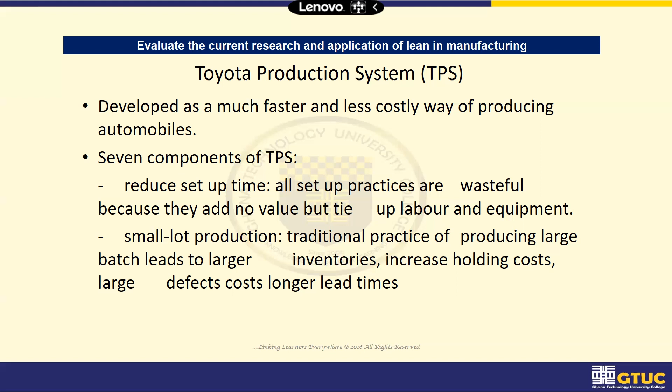And then we have the Ford production system, which is quite different from the Toyota production system, that one had certain core concepts or core principles that guide it. We are saying that it is a lean, flexible, disciplined production system that empowered people to produce and deliver products that consistently exceed customers' expectation in quality, cost, and time.

Let me also rehash this point that lean does not lead to exceeding customer expectation. Lean believes that if you exceed customer expectation, you produce what the customer has not requested, you just want to excite the customer. What you are doing is producing waste because it's not going to add any value and the customer is not paying for it. So with Lean, we rather meet customer expectation.

But what we earlier discussed, the Toyota production system, was rather practicing that part of Lean that is more stringent. But the Ford production system says that it is Lean flexible. Now you see that we are being flexible with the principle of Lean, and instead of meeting customer expectation, we're exceeding.

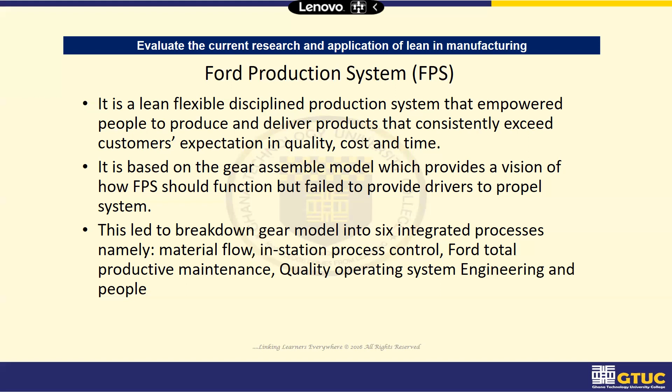And this led to the breakdown of the gear model into 6 integrated processes, namely material flow, in-station process control, total productive maintenance, quality operating system, engineering, and people. So the gear model was segregated into 6 processes, which is what I have just mentioned: material flow, in-station process control, total productive maintenance, quality operating system, engineering, and then people.

So these are the explanations for the 6 integrated processes, where you have the material flow, how manufacturing material flows, and we have the in-station process, where the issue of jidoka comes in, where workers are empowered to detect and eliminate defects based on tools like stop lines and Andon boards. We'll talk about jidoka, what it means, and we'll explain that further.

We have the 3rd, total productive maintenance, which is a preventive maintenance system. We predict the reliability of machines with time, the number of hours after which we have to intervene, and then ensure that machines do not break down.

So if you are minded, you realize, those of you who are in the automobile industry, my good friend who works with Japan Motors, now parts have a number of hours that they have to do. It's not like those times where they could use the part forever and even go and modify it and all that. There are certain parts, even plugs, that have a lifetime. After the number of hours that it needs to do elapses, you will have to replace them with new parts. And that has been the norm.

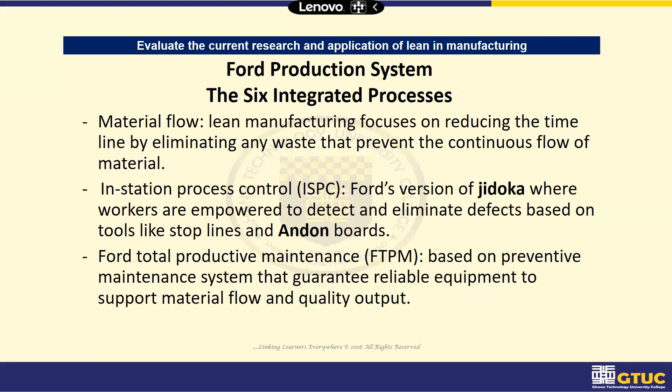And there is also the fact that intermittently, these things can break down, due to no fault of anything. It might be an unexpected mishap that probably happened during production. So you see the number of times these things have happened, and you can leverage on it and develop a preventive system where at any point in time when the thing breaks down, you have the part to replace in order not to stampede production. So total productive maintenance is also part of the Ford system.

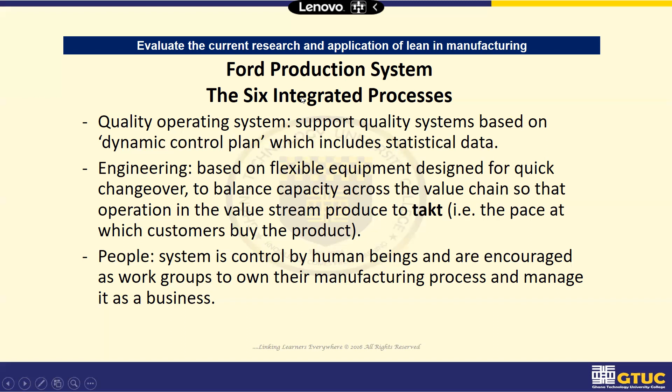We talked about quality operating system, engineering, and people. People here: we said the system is controlled by human beings who are encouraged as work groups to own their manufacturing process and manage it as a business. So with this one, the Ford production system tries to integrate people into the system. And the fact that they have to own the process literally means that people are delegated with power to be able to work and be responsible for their actions or inactions. So that's just about the Ford production system.

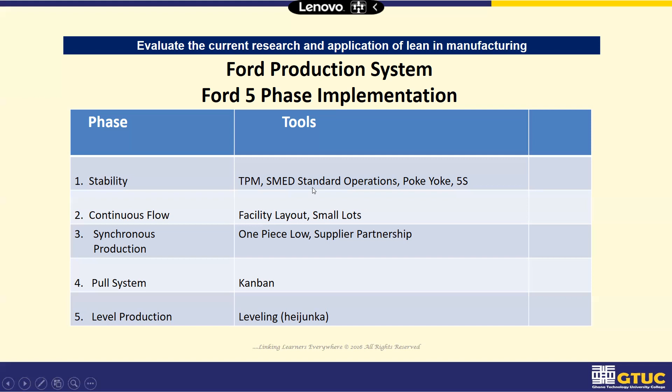Then you have the 5S's. So when you are doing stability, these are the tools that you need to use. And then you can also do continuous flow, where you have facility layout and small lot, as tools. For synchronous production, use one-piece flow and also supplier partnership. And the pull system uses Kanban. Kanban talks about the pull system. And then level production, where we are using leveling, that is Heijunka. So that's what the Ford production system is telling us. So these are the 5 phases.

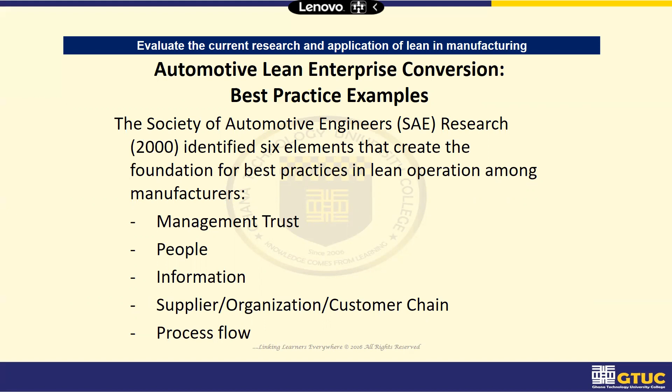Then we have something we call automotive lean enterprise conversion best practices. I'll leave that to you. The Society of Automotive Engineers research identifies 6 elements that create a foundation for best practices in lean operation among manufacturers. These are management trust, people, information, supplier, organization, customer chain, and process flow. This is what SAE proposed as best practice in lean operation amongst manufacturers. So they need to take these things as principles or best practices to follow. That's what they prescribe.

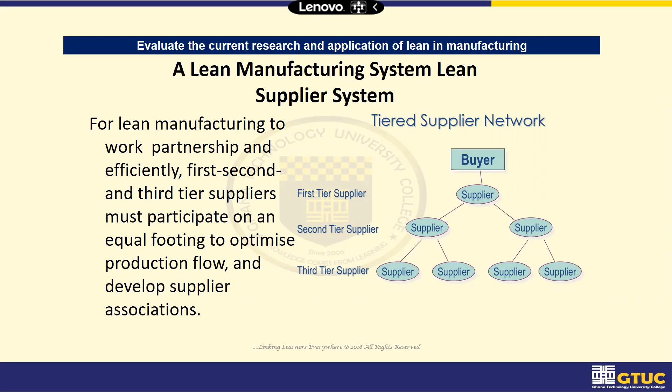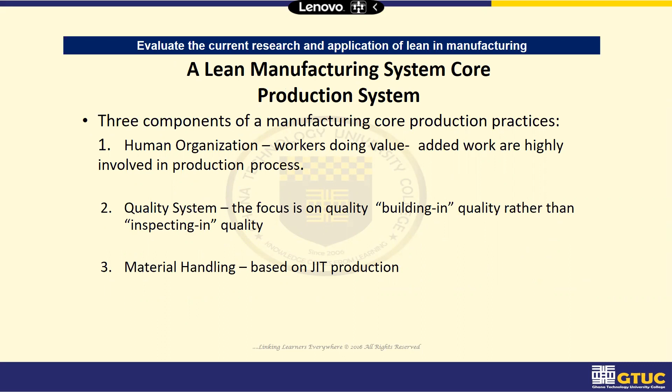So this is how the suppliers are segregated, and we make sure that they all practice this lean system. Okay, so these are other things that we can look at. You can read about a lean manufacturing system, core production system, and elements of lean production by Nicholas, 1998, small lot production. These things, you see some of them repeating, and the setup times, which we've talked about.

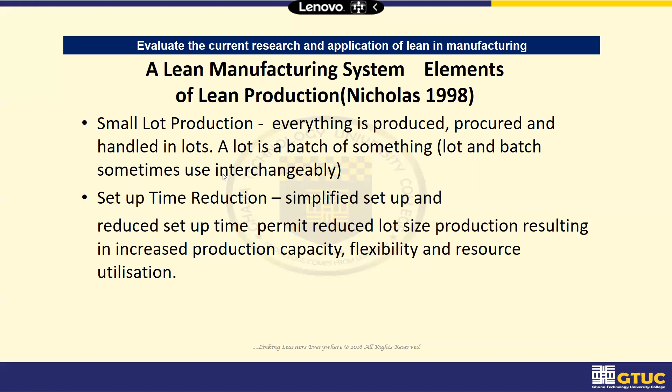But one thing you should know: even if you look at the lean Toyota production system and then the Ford production system, you realize that most of the things are concepts that have just been altered. Okay, so they look the same. One says that it's being stringent with lean, that is the Toyota production system, and the Ford production system says that it's being flexible. And these are just semantics, in my opinion, as they use some of these concepts. Okay, so that is just about it.

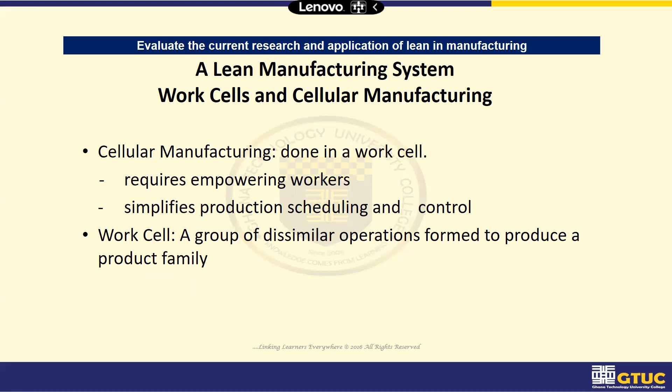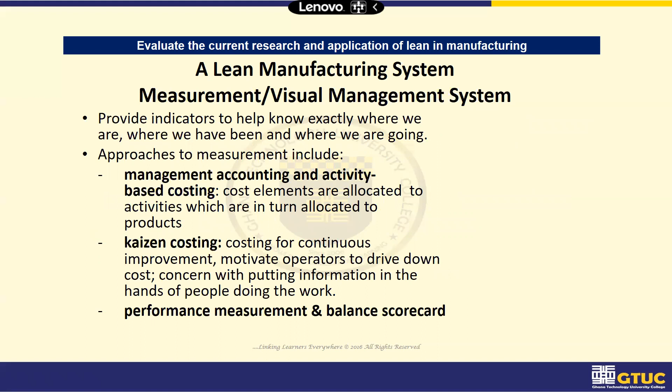And then we talked about the work cells and cellular manufacturing. The single piece flow cell is based on cellular manufacturing. We are going to deal with it as a separate topic and discuss it in detail. So that is just about it. These are all snapshots. Visual management system is also one of the learning outcomes, which we are going to talk about. And then we said that the foundation model of lean focuses on two main things: value added focus and sources of waste. These are the main foundation of lean.

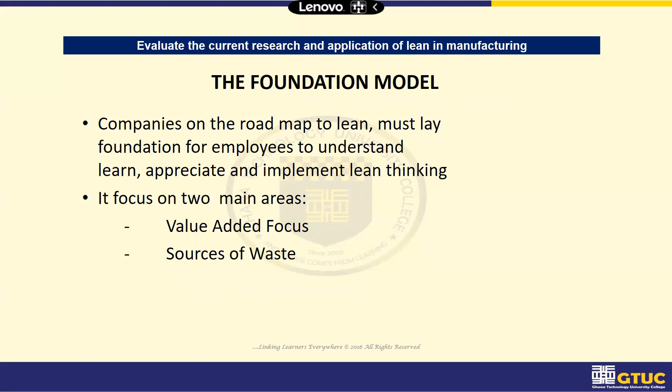So if you look at the lean house, you realize that what they are talking about is more prevalent in there. So you see the value added focus, and then identify the value stream. So this model helps you if you want to implement lean to go this way. Okay. We are saying that the value added focus is a concept that every activity and element of the system, material, human, should add value. If it doesn't add value, eliminate it.

Okay, according to Womack and Jones 1996, value can be defined by the ultimate customer, and it's only meaningful when expressed in terms of a specific product. So it's only the customer that can tell you what value is, because he or she is the one investing into the business, and they can tell you whether they are getting value for money or not. Value is created by the producer from the customer's viewpoint. So you don't determine value, it's the customer.

And then we are saying identify the value stream. Value stream is a set of all the specific actions required to bring the product through the three critical management tasks of any business, namely the problem-solving task, information management task, and the physical transformation task. So to create value, you need to look at the stream of the value, and these are the three main streams that help you to achieve that.

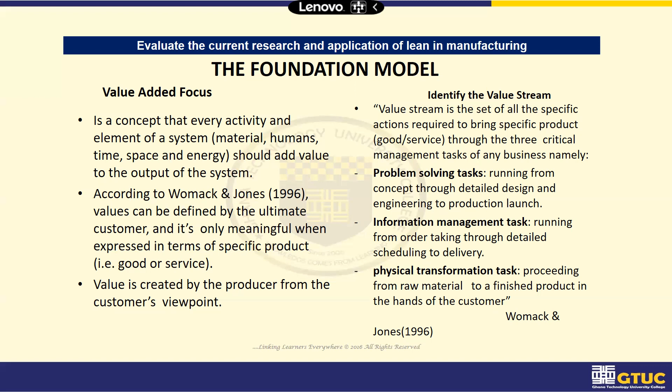In problem-solving tasks, you are running from concept through detailed design and engineering to production and launch. In information management tasks, you are running from order taking through detailed scheduling to delivery to the customer. And in the physical transformation tasks, you are proceeding from the raw materials to finished product in the hands of the customer. And that's what Womack says, okay? And in the same foundation model, you have the sources of waste and then the lean focus.

We said muda is the Japanese word for waste. I gave you an assignment. I said there's muda, mura, muri. Did anyone get the understanding of mura and muri? Did anyone check? Yes. So I checked. Yeah, I'm listening. Who else? Who else? Mura, muri. Did you hear it, or should I repeat? Go ahead.

Okay, so muda is the waste, mura is unevenness, and muri is overburden. So that is true. Who else had the understanding? The unevenness is what? Is it mura or muri? No, it's mura. And muri is what? It is the overburden. Overburden. Okay, that's fine.

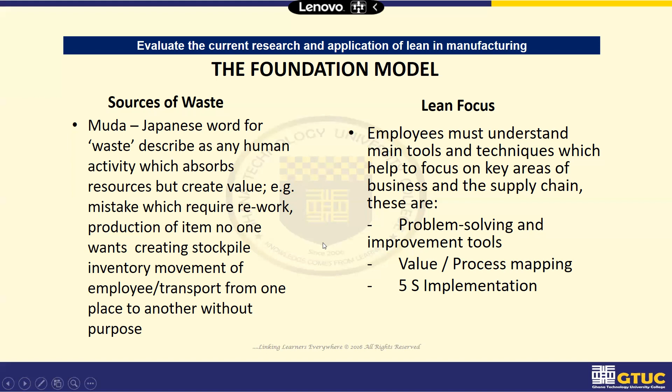So people and lean, 3 things to look at. The importance of people, management attitude, and lean behavior. Yeah, lean talks about the importance of people, but lean to some extent, if it is the flexible type, then it accepts the initiative from people, it considers people's views and all that. But if it is the stringent lean strategy, then you have a problem. Then you become more mechanistic.

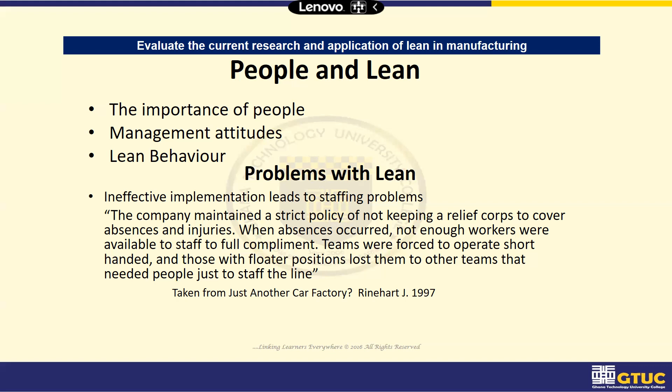So people apply the lean principles, but they use that with a human face because lean focuses on only the process and not the product, okay? Only the process, with little focus on the product. Most times they end up not getting it right. Now, organizations that implement lean are now refocusing on what? The process and the product as well. For which reason now most businesses have deployed Lean Six Sigma. Lean Six Sigma, a strategy to ensure that whilst we focus on the process, we also focus on the product. Okay. So that is it.

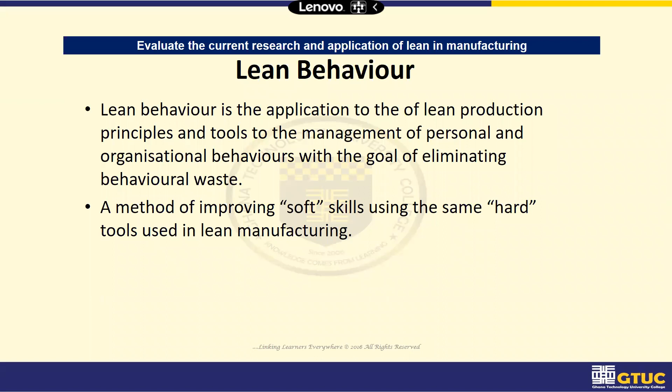So importance of people, we've talked about attitude, lean behavior. Lean behavior is the application of the lean production principles and tools to management of personal and organizational behavior. We use it as a tool to measure and change behavior with the goal of eliminating behavioral waste. So we could have behavioral waste because of people who are adamant, who are not focused, who are not responsible. For instance, they allow things to get spoiled, allow things to go to waste. And that is one thing we need to look at. And it's a method of improving soft skills using the same hard tools used in lean manufacturing.

Okay, so we have the lean behavior and the fat behavior. So for the fat behavior, you have confusion, ego, irrationality, revenge, inaction, uncertainty, negativity. Then we have gossip, sarcasm, deception, selfishness, and criticism. That is the fat behavior. But when you apply lean behavior, it means that you have self-awareness, you have compassion, there's calmness, honesty, there's consistency, there's generosity, there's humor, there's understanding, respect, listening, trust, and sincerity. And that is the lean behavior.

So we can inculcate or imbibe the lean behavior into the organizational core values that people will live with and make sure that they integrate those principles into the working culture. And that is really going to help them to achieve their vision. So that is very, very important.

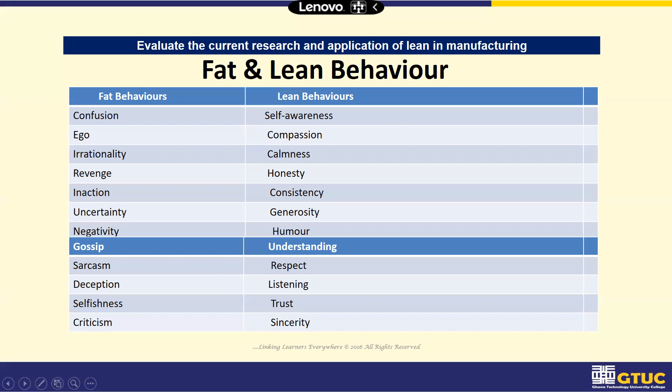So we have characteristics of lean. With the customer, the external customer is the starting and the ending point. One of the characteristics of lean is that the customer is the starting and the ending point. And lean seeks to maximize value to the customer. Simplicity in operation, in system, in technology, in control is the goal of lean. And there's also the issue of visibility, where they seek to make all operations as visible, as transparent as possible.

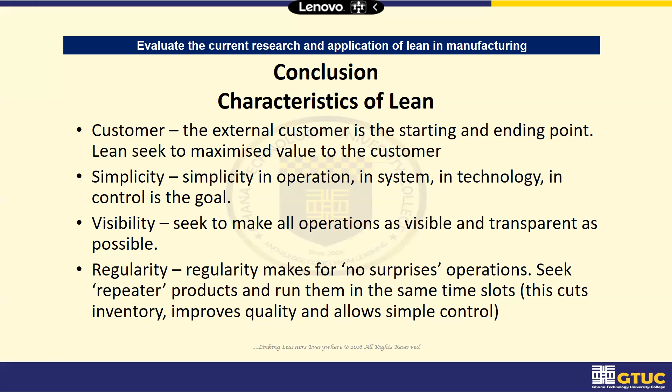And the regularity makes for no surprises. Operations seek repeater products and run them in the same time slot. This cuts inventory, improves quality, and allows simple work control. So we have customer, simplicity and regularity. Synchronization, okay? You synchronize operations so that it's able to meet the just-in-time principle. For example, one-piece flow. And the pull system, which is the Kanban system, makes sure that we avoid overproduction. We will produce what the customer has requested.

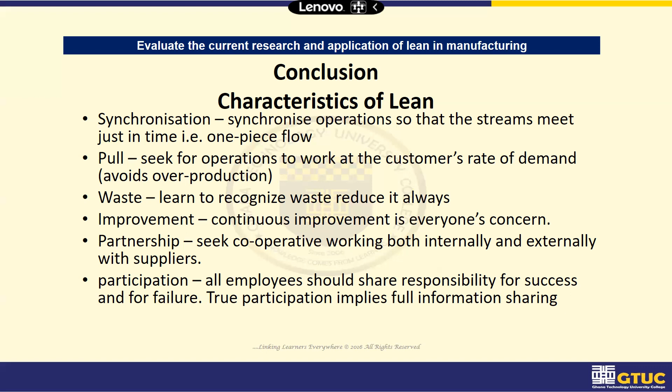And then lean waste, you eliminate waste from the system, improvement. There's something called continuous improvement. In fact, it has been changed by ISO to continual improvement. So it should be everyone's concern. So we say that lean is actually not a destination, but it's actually a journey, an unending journey. We embark on that journey with the idea of improving every day without a target of getting satisfied with the end result. So this brings us to the end of the first section.

And these are examples of questions that you want to look at. Lean is about rules and principles, not a collection of tools. Critically evaluate the statement and discuss 5 thematic areas to justify the lean transformation. And then these thematic areas have been given. If you take education, people need education in lean. So how does the organization implementing lean get this education? Through workshops and seminars, getting everybody along.

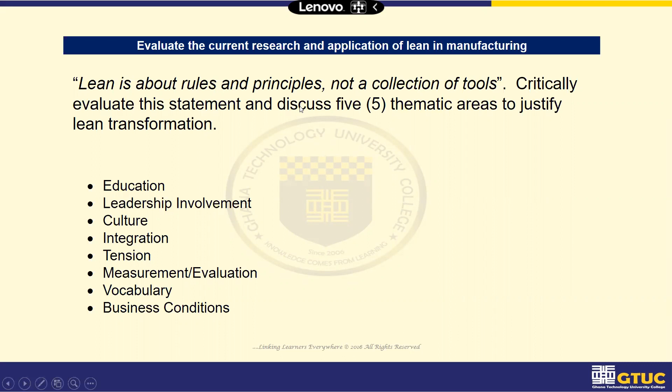Leadership involvement. Lean is more of management driving the process, not just workers being asked to do this thing piecemeal. And the culture of lean, we talked about lean behavior, integration, the fact that we ensure that all the processes are integrated so that there's flow of raw materials through the system, tension, measurement, evaluation, vocabulary, and business conditions. These are some of the thematic areas. It's one of the questions that we propose, but not to worry about it, just to guide you as students. So we'll move to the next session.